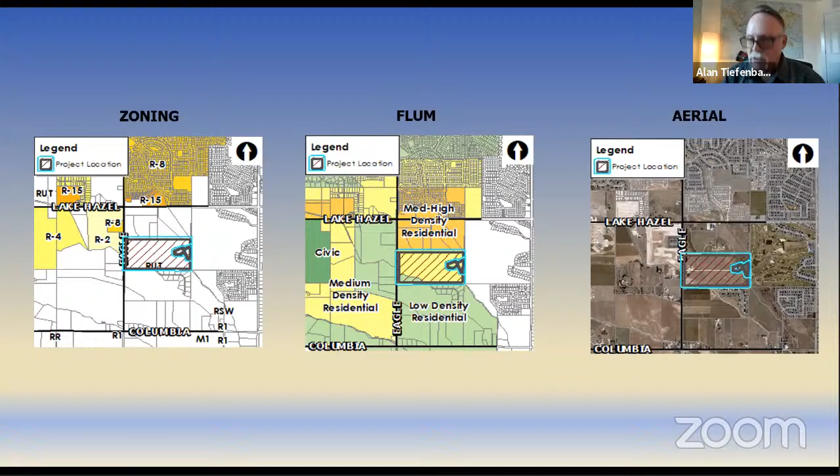At the time of the staff report, when this first went out, only 1 comment had been received. Since that time, we have 11 more letters that have been received. The issues expressed are a lack of transition in density, the R15 zoning being inappropriate, lack of sidewalks, and the reasoning from citizens is lack of sidewalks to fit more houses in, inadequate green space, this being fringe development. There were some concerns about school capacity, road design, and the proposed usage of Vantage Point Road, which I will get into shortly.

So here is the proposed zoning for this project. The applicant proposes R8 on the western portion of the site, so over here this will be residential 8. On the eastern part, over here, this is proposed as R15. R8 requires 4,000 square foot lots and a 40-foot lot frontage. R15 allows 2,000 square foot lots, and it does not have a lot frontage requirement.

This is important because the applicant has requested R15 zoning so that they can do private streets that would not be allowed under R8 or R4 zoning. All of the development is proposed, and all of these lots would meet the minimum requirements of R8. R15 is unnecessary, except for the reason of wanting to do the private streets.

As proposed, this zoning would zone the denser portions of the property to the less dense zoning. So this is the denser area, especially these attached units, these would be zoned to... the denser area would be zoned to a lesser zone district, less dense, and the lesser dense portion of the site over here would be zoned to the higher density zone district.

Staff has also mentioned to the applicant that we have some issues with the transition of lots. To the southwest, the development proposes lot sizes of 6,000 to 6,500 square feet, that's in here. The applicant has noted in a response letter that future development in the unincorporated land directly adjacent, down here and vacant now, would likely develop at a density of 8,000 to 9,000 square foot lots at 3 units per acre. However, the future land use map actually recommends this area for less than 3 dwelling units per acre, so staff is not convinced that would be the case.

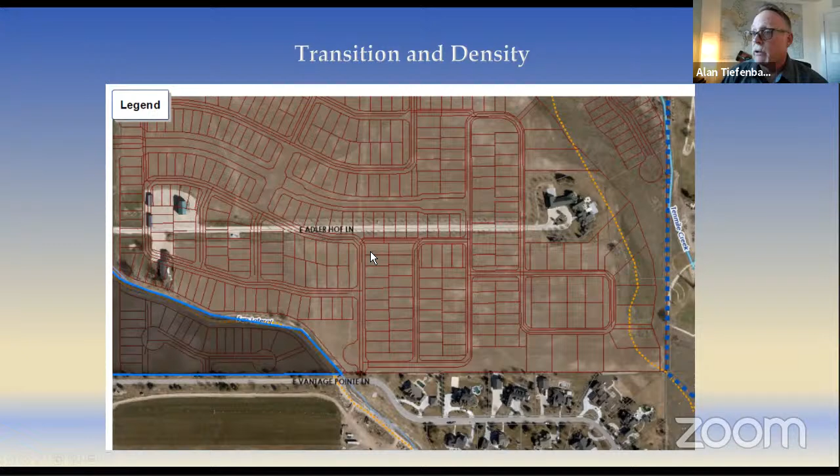Since the staff report went out, the applicant has submitted drawings proposing additional screening and buffering in this area. The Planning Commission should determine whether the applicant has provided an appropriate transition in lots to the Vantage Pointe subdivision.

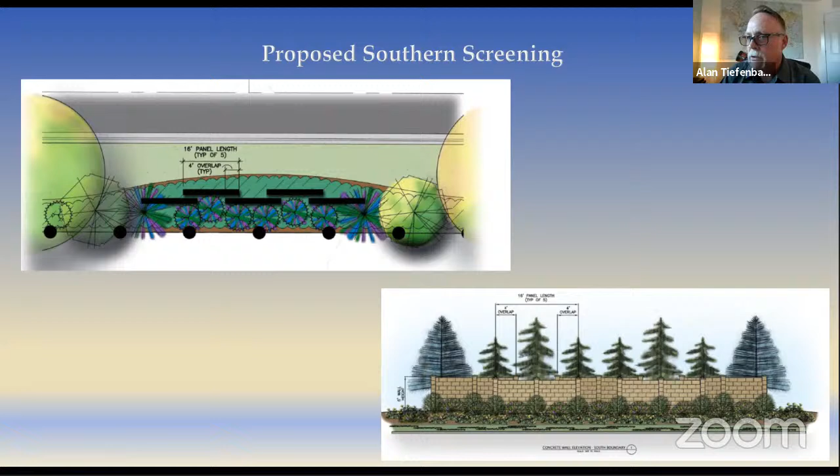The fire department has noted that this development can be serviced by the fire district, but has concerns. The major one is that this large subdivision, 329 lots, will only have one access. It now has multiple points, or two points of access to Eagle Road, and there could be an emergency access here. But only Eagle Road is the real point of access. If Eagle Road was blocked for any reason, fire would have to go all the way around, which would really slow down response time.

Fire has mentioned that they prefer a connection to Lake Hazel to the north. They had mentioned that they think preservation of the southern rim would prevent such an access. Planning isn't convinced - there could be discussions about the properties to the north to get a northern access here.

We have concerns with only one road in, one road out. The west end does fall within the 5-minute response time, but the majority of the subdivision is outside of that, as you heard this evening. The nearest station currently has a low reliability rating, which would improve once the new southern station is built - which you'll hear about in the next case tonight. Fire has also noted that the gates would cause delays.

Staff would prefer that the applicant work with one or some of the property owners to the north to achieve access to Lake Hazel, giving a second point of access out of this subdivision.

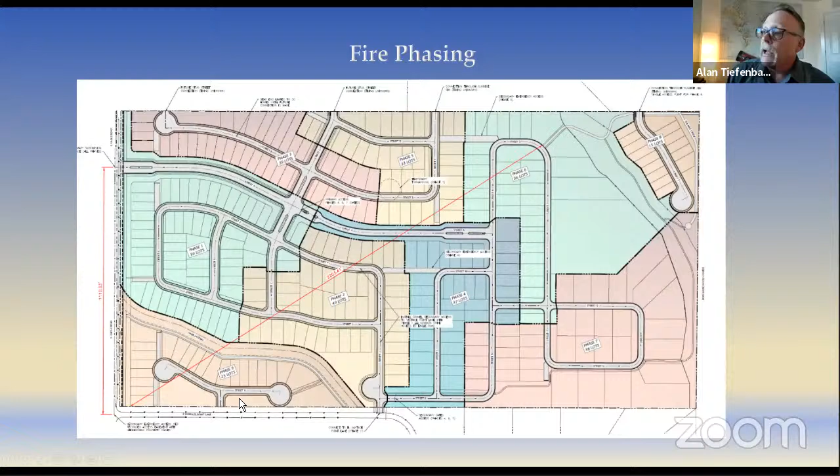The applicant has submitted a fire phasing plan including 59 lots in phase 1. Only phase 8 proposes access from anywhere other than Eagle Road. Phase 9 only has emergency access, which I'll discuss shortly. Also, all lots except for 15 in phase 8 utilize Eagle Road as the only point of access. Phase 8 cannot be built until Pura Vida builds out, so unless that happens, this phase isn't going to happen.

Phase 9 does not have any proven access. There is an emergency-access-only easement allowed here, which makes appropriate access for this particular phase, but all 23 lots here cannot be served at present unless the applicant gets legal access. Staff has concerns with supporting the project where we do not know if they have legal access, and the developer at this point does not seem to have control over that.

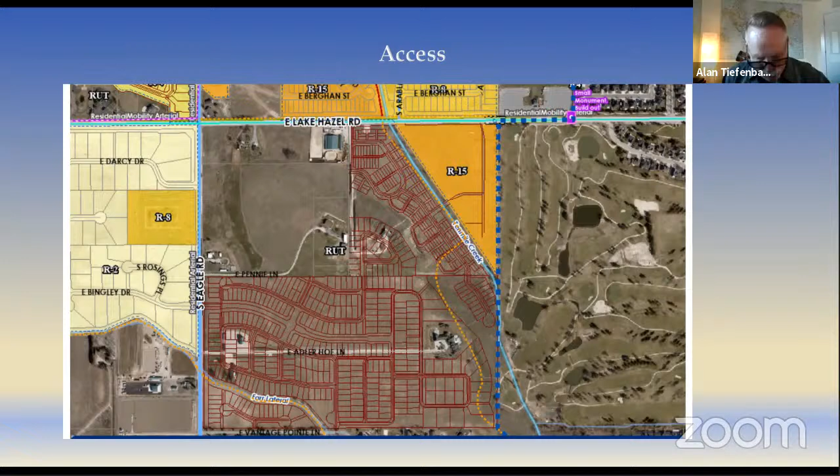This application proposes 112 lots to be served by private roads and 2 gates. I've outlined in red the area that would be served by the private roads. The private roads proposed are as narrow as 27 feet with no sidewalks or landscaping. The applicants commented that 27 feet is a minimum width for ACHD, but it does not meet ACHD templates because there are no sidewalks. Because these roads aren't built to minimum ACHD standards, they pass maintenance costs on to the homeowners in perpetuity, or the homeowners association.

Because they don't meet ACHD standards, if there were financial constraints or anything else in the future, ACHD would not accept these roads. Staff does not understand how narrow roads without sidewalks are innovative or preferable to streets with sidewalks. Staff has asked the applicant to explain why this is preferable, other than the ability to increase lots or reduce building costs. The only explanation we've gotten is that it provides an intimate setting and that there's a demographic that prefers a gated community.

Staff has concerns with supporting this feature without sufficient justification, and what precedent it would set for future requests to build roads that don't meet minimum templates. The applicant has requested alternative compliance to allow 112 lots be served by 2 gates and 2 emergency gates, 3 common driveways off of a common lot. The planning director denied this request for alternative compliance, believing that none of the conditions for alternative compliance was met.

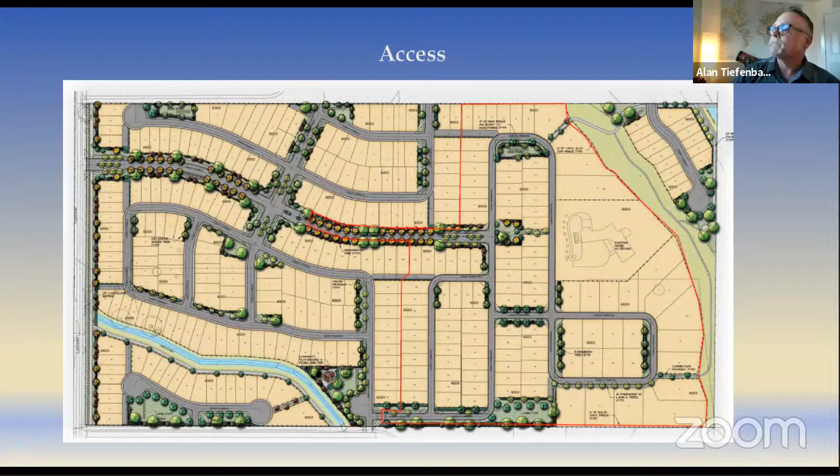Parks, amenities, and open space. The applicant states 14.99 acres, or 18.8% of open space, is provided. These parks and amenities include a 3 and a quarter acre tot lot with play structure, climbing rocks, and outdoor seating, which you can see here, a 1 acre open sports park, which you can see here, pathways along the far lateral, which you see here, and there's also a pathway coming along this slope. There's a golf cart pathway here, which would provide golf cart access into the Boise Ranch Golf Course.

There are several dog parks. There is one shown here, there is one shown there, and there is an entry park, which you can see here.

Staff does believe that some of these amenities would be valuable, such as the sports park and the tot lot. However, aside from that, much of what they're crediting as open space is buffers along roads, end caps, open space that could not have been used anyway, like the slopes or the area within the far lateral, and not all of it is landscaped per the UDC requirements. You have to have one tree per 100 linear feet for a pathway, and for common open space, one tree per 8,000 square feet. We don't see that within the area of the far lateral or around the slope area.

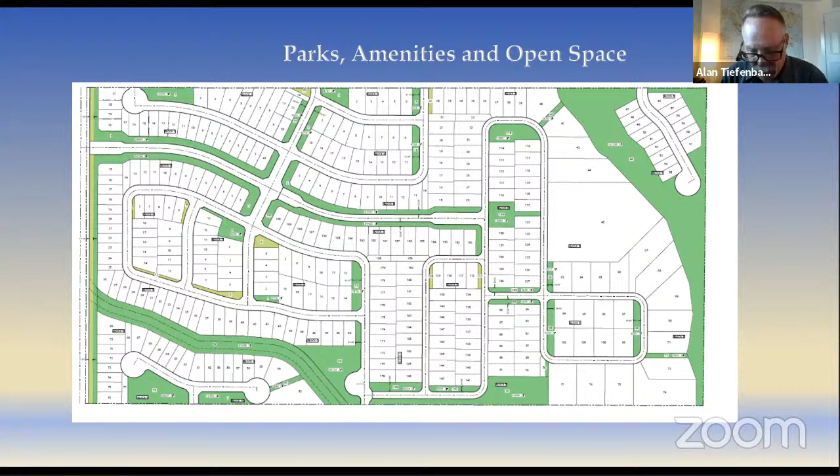The applicant has submitted a pedestrian circulation plan with this proposal. All the private streets shown without sidewalks are being reflected as pedestrian connections. The Planning Commission should decide if those really are pedestrian connections, and whether this is appropriate open space and amenities. Here is the proposed pedestrian plan - again, you'll see that many of the roads that do not have sidewalks or pathways are shown as a pedestrian connection.

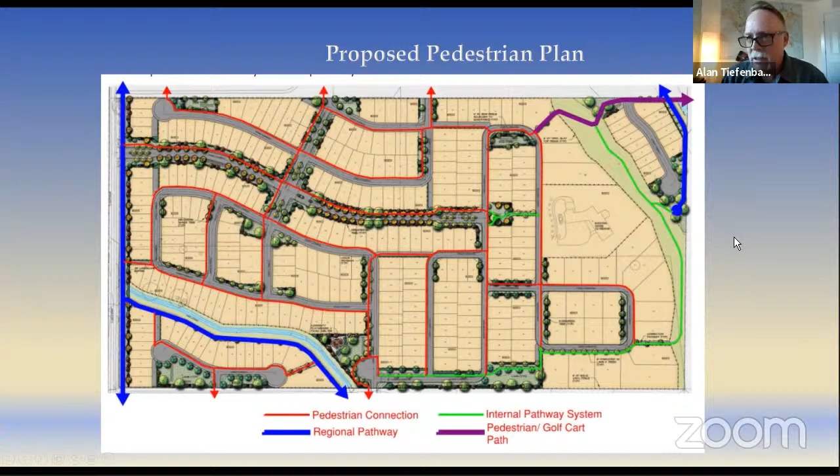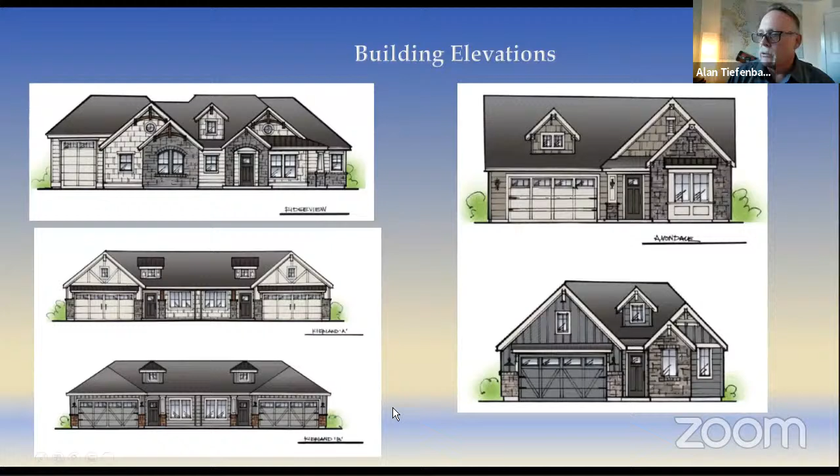Here's just a picture of the elevations. Overall, we believe that the elevations are quality and we support what they're doing with that. You can see the single family residential as well as a duplex style elevation.

Staff recommends denial of this project. Staff does not believe this project substantially complies with the comprehensive plan and is in the best interest of the city. This is why: there's only one access road for all but 15 lots, and the applicant has not demonstrated legal access for 23 of the lots in phase 9.

We believe there's an inadequate transition of lots to the lots in the Vantage Pointe subdivision. We are struggling with the higher density zoning for the lower density area, and the lower density zoning for the higher density area, when really it's just for the purpose of allowing the private roads.

We don't support it because we believe it's located on the fringe. There are only a few places where it's adjacent to the city limits. We don't believe it's an infill development.

We don't support it because of the narrow private streets with no sidewalks. It does not meet the comprehensive plan's goals for a walkable community. Although fire says they can serve it, they have expressed concerns with this development.

There is some quality open space, but much of the open space being credited is not usable, even if it meets the minimum dimensional requirements.

The applicant has noted school capacity will not be an issue because it's age targeted. But unless it's deed restricted, there's no way we can enforce whether or not it's going to be above 50. So it may be sold or marketed as over 50, but we can't enforce that unless there's some sort of deed restriction.

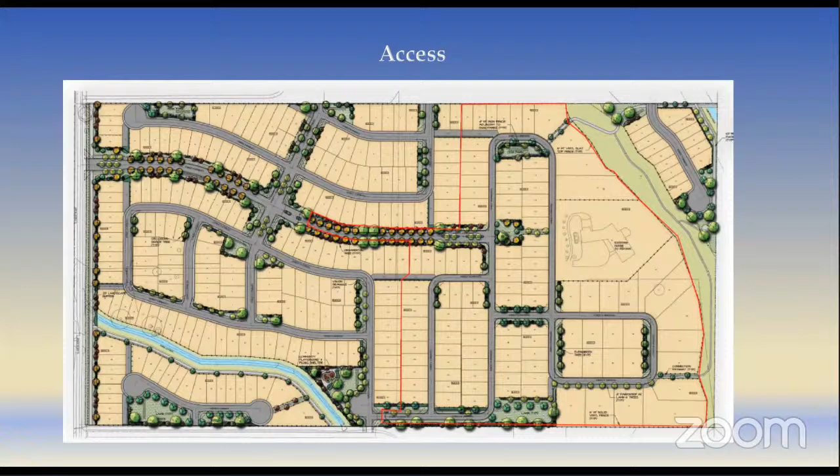Let's see, start here. Well, good evening commissioners, can you see my screen? Not yet, is it sharing? Okay let me try again. Okay, I think it's working now. Good evening commissioners, my name is Deborah Nelson.

My address is 601 West Bannock Street. I'm here on behalf of the applicant, and members of the development team are here with me as well and available to answer any questions. We're going to start with a brief fly-through of the development.

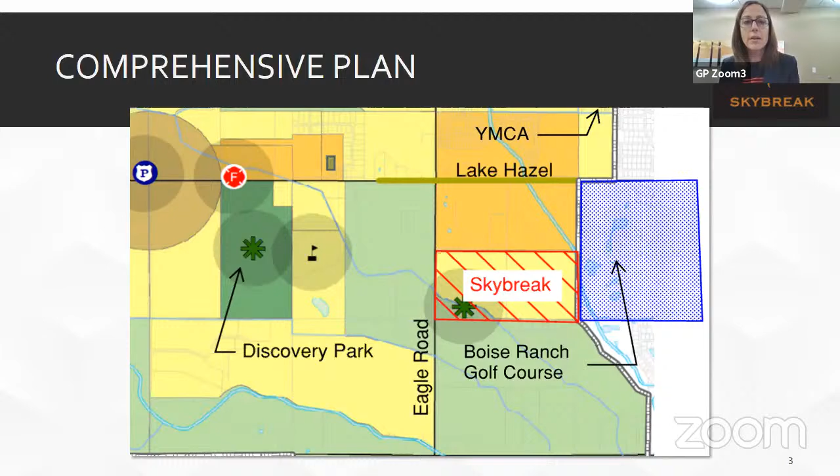Additional rooftops in this quickly developing area of Meridian help support the future commercial and retail uses along Eagle Road, Lake Hazel, and Meridian Road, including in the recently approved Pinnacle project, which has neighborhood commercial at Lake Hazel and Locust Grove. The 77-acre Discovery Park and the new South Meridian Fire Station site are just a half mile to our west. Pura Vida and Poima were just approved to our northeast. And we're close to shopping, healthcare services, employment opportunities, and regional transportation arteries.

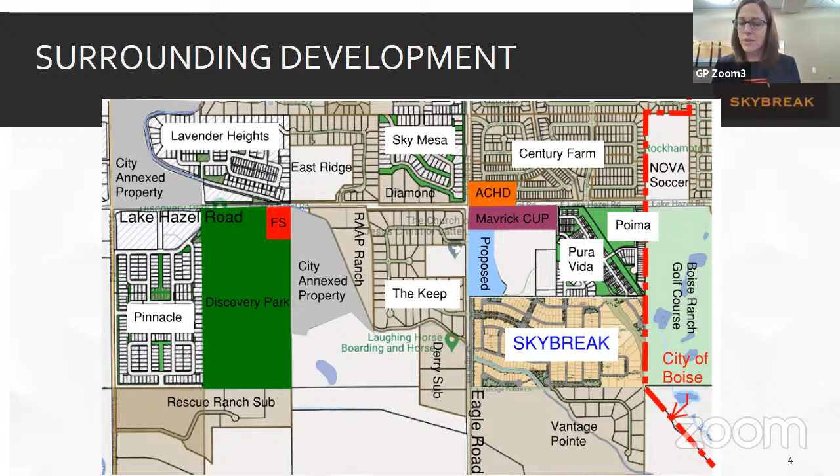The Skybreak site plan embraces the property's challenges and opportunities. The southern rim with a 50 to 60 foot drop along our east end provides exceptional view lots along with an opportunity to protect that natural hillside with open space and a pathway. The lack of road access along our northeast and east and southeast due to these existing developments makes this site ideal for a gated community because it doesn't block any road connectivity.

The golf course on our east side provides its own great opportunity to connect with pedestrian pathways and a cart path. A large existing home will remain, so we'll surround it with other large custom homes. Attached housing in our northwest transitions to high-density development planned to our north, larger custom home sites along with open space and landscape buffers transition to existing low-density homes to our southeast. Smaller lots and homes in the west along East Eagle Road transition to larger lots and homes in the east along the rim. All of these will meet the R8 dimensional standards in your code.

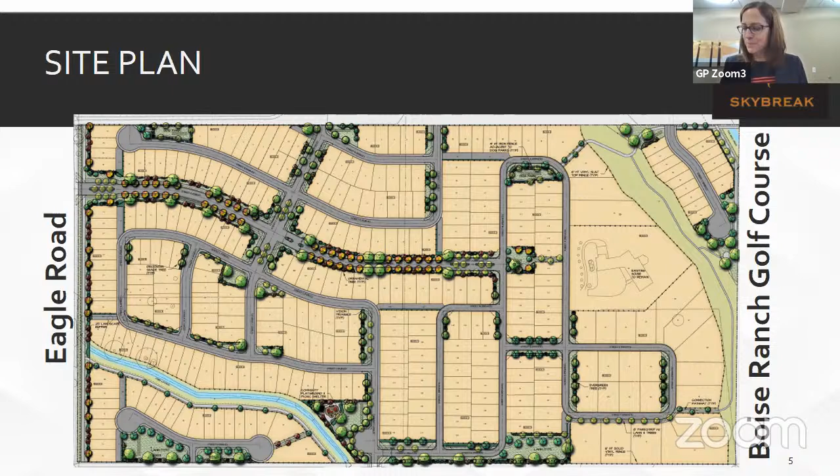A portion of the Skybreak community is gated and utilizes private streets to create a more intimate neighborhood setting within the larger Skybreak community. The development team has done extensive marketing and polling of past and future homeowners and has found that a demographic of senior home buyers prefers the security that a gated community provides.

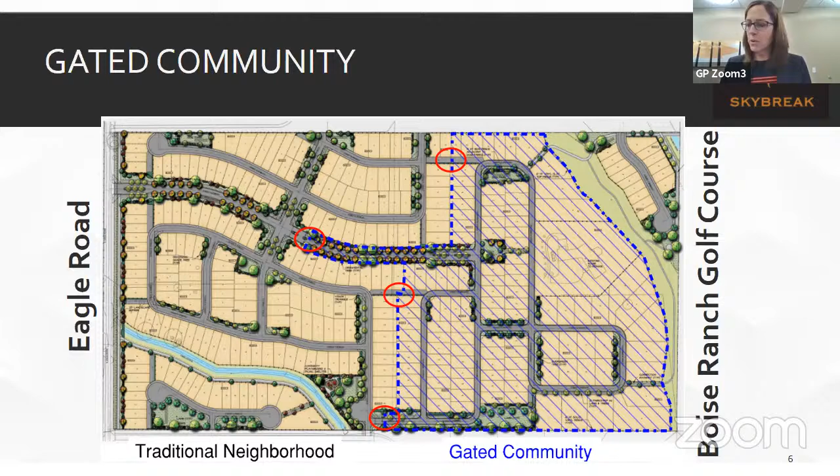The gates do not create any pedestrian barrier. The sidewalks and pathways are not gated. The gates slow cars, and the narrower private streets are intentionally designed without sidewalks in many locations to provide a pedestrian lifestyle where residents walk and convene in the streets and engage with each other. The development team has done other communities with the same private street design, and customers pay a premium to be in these gated communities. Everyone views the streets as walking paths that cars are allowed to drive on.

We have a video to illustrate this that we'll show at the end if we have time.

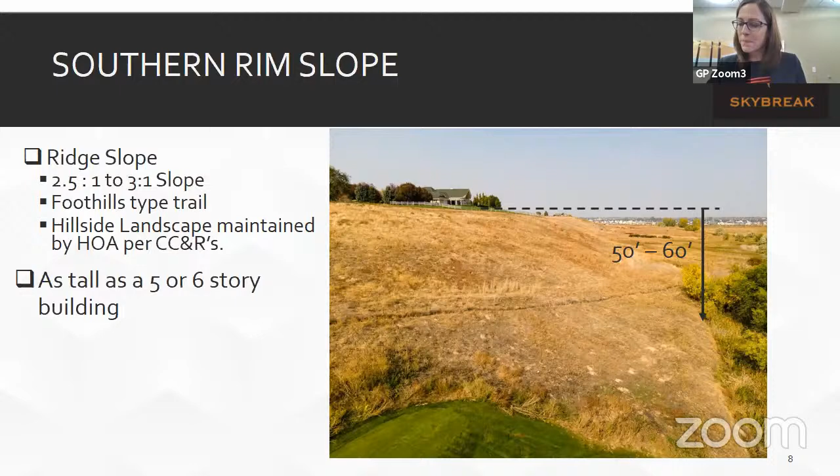The Skybreak property is ideally suited for a gated community because of several factors: the steep natural hillside of the southern rim, the lack of road connectivity on our eastern end above the rim due to the golf course to our east, the Vantage Pointe subdivision on the southeast, and Pura Vida, recently approved on our northeast, which does not include any road below the rim and down to connect to Lake Hazel.

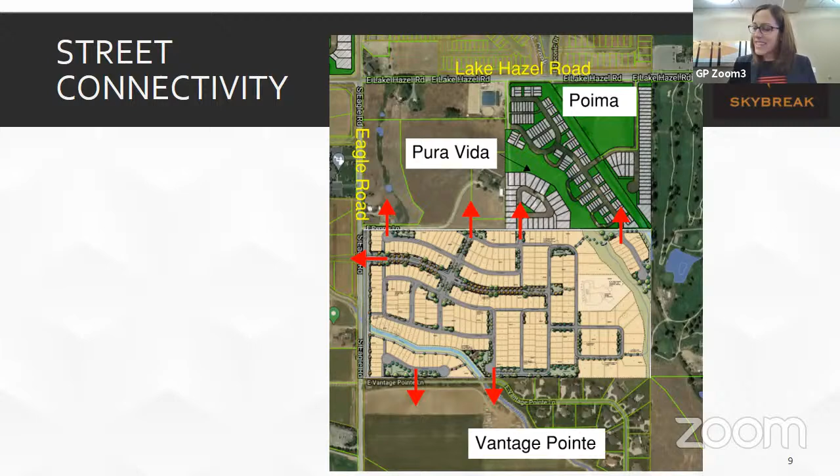Where we can connect to surrounding properties, we do: below the rim in the northeast corner, 3 additional places on the north, our western entrance, and 2 places on the south.

Skybreak includes premier open space and amenities. The developer has researched and interviewed past homeowners and used the city code to plan the most productive amenities for this neighborhood. Skybreak's planned open space and amenities far exceed city code requirements, providing 15 acres and 18.8% qualified open space and providing 14 amenities where only 4 are required.

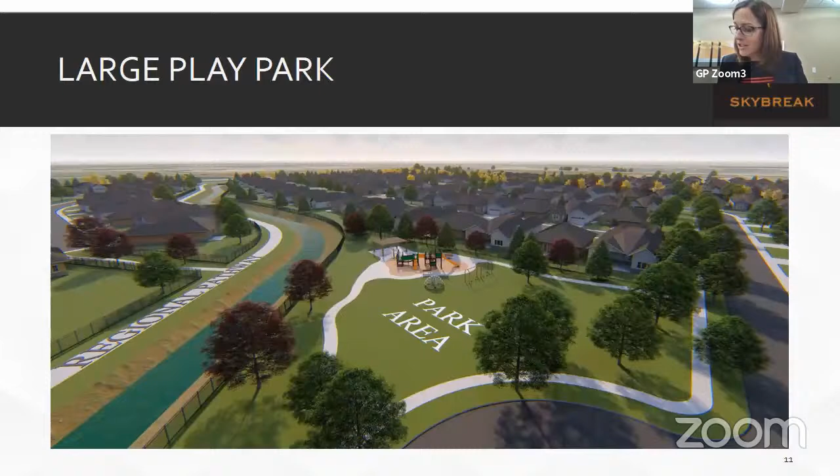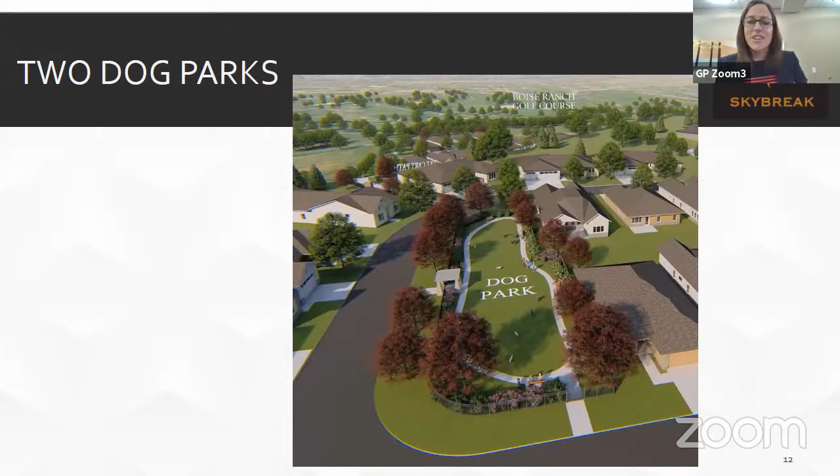Skybreak's open spaces and amenities include in our 3/4 acre park, we have a play structure, seating benches, shade structure, and climbing rocks. We have 2 dog parks because they are in such high demand by residents, each with open vision fencing, a dual gate system, and seating benches.

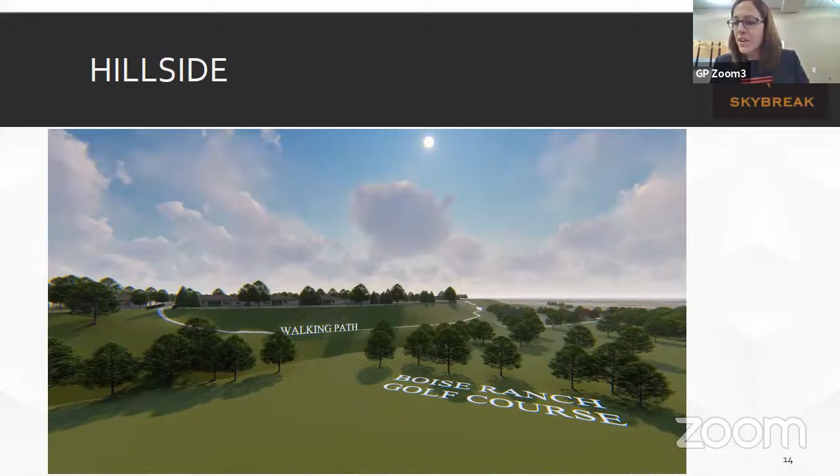Our 1 acre open sports area with pathways, seating areas, and landscaping includes a large grassy central space to accommodate sports activities. Our natural hillside area is 2.82 acres, including native grasses and a natural hillside path with open views that everybody can enjoy. Here you can also see the golf cart access to the Boise Ranch Golf Course and one of the 2 10-foot regional pathway segments this development will provide.

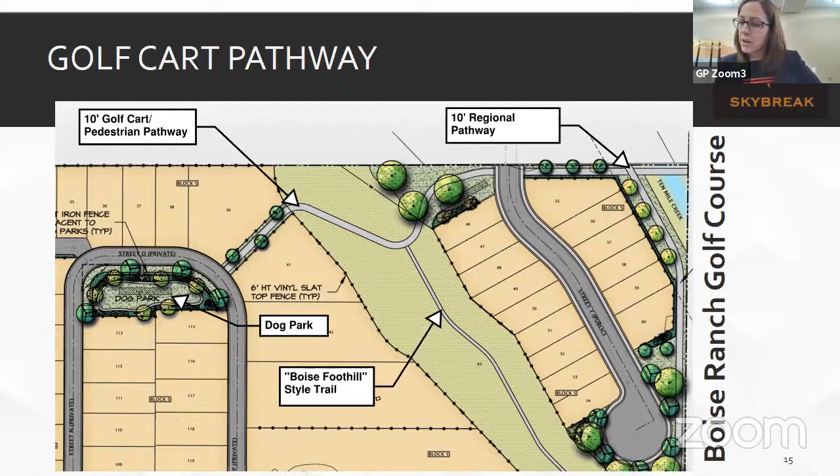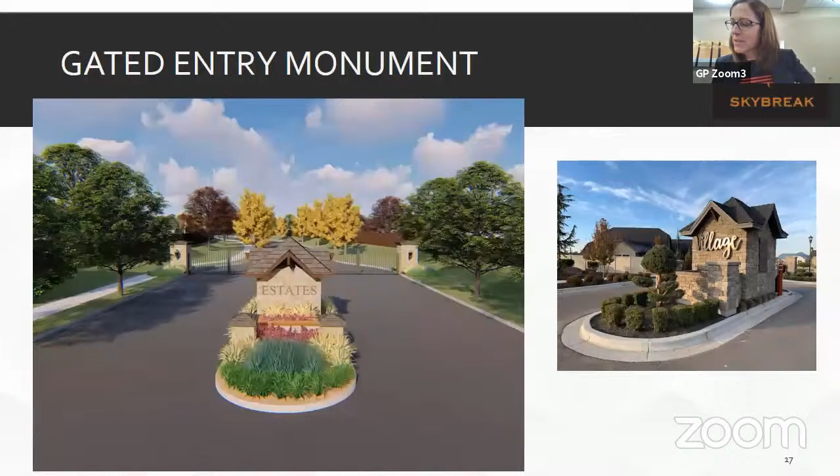Our entry park makes an attractive statement upon arrival and also caps the tree-lined collectors where residents walk, with seating areas and specimen tree plantings, and landscaping along the central collector and end caps adds aesthetic beauty and passive open space areas throughout the development. This slide in particular illustrates the value of that end cap landscaping to create a beautiful neighborhood, add privacy, and enhance walkways.

Skybreak has over a mile of constructed sidewalks and pathways, including a half-mile of multi-use regional pathways and a unique natural hillside path similar to neighborhoods in the Boise foothills, plus a loop around the entire development. None of those metrics include the walking paths within our private street network. That is over and above that description. In addition, Skybreak is a half-mile walk to the city's 77-acre regional Discovery Park.

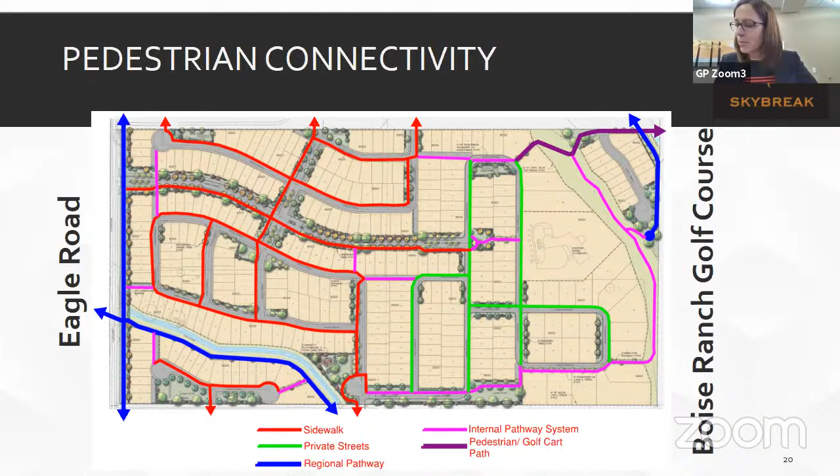In our northeast, Skybreak transitions to the higher density Pura Vida and Poima developments with smaller lots, continuous open space along the rim, and street connectivity above and below the rim. In our southeast, Skybreak transitions to Vantage Pointe with buffering, screening, and transitional densities.

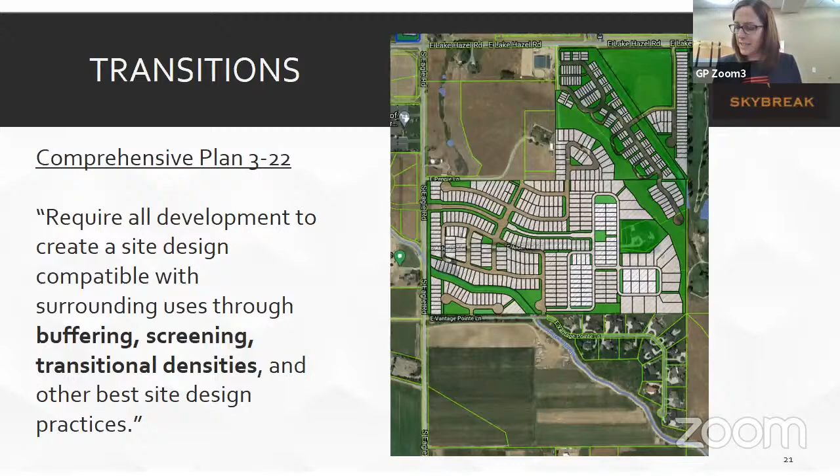Here you can see that southeast area in more detail. On the west end, we provide separation with a 50-foot wide landscape buffer around a local street, a 1 acre park, plus berming, landscape screening, and concrete walls to ensure no headlights disturb the neighbors.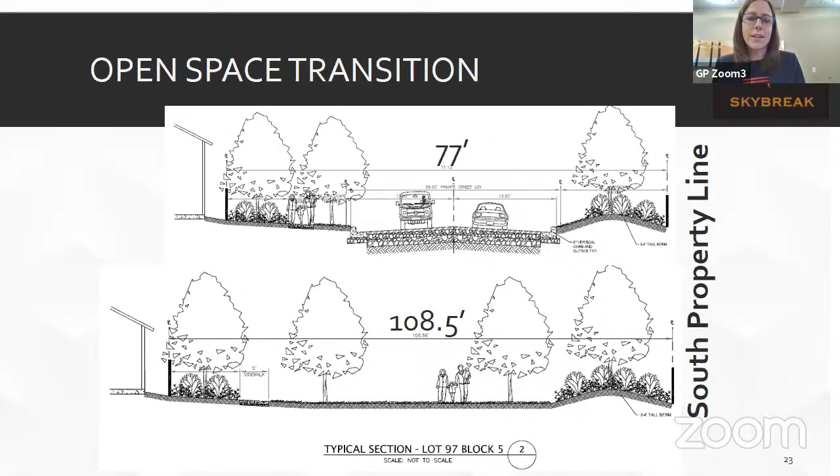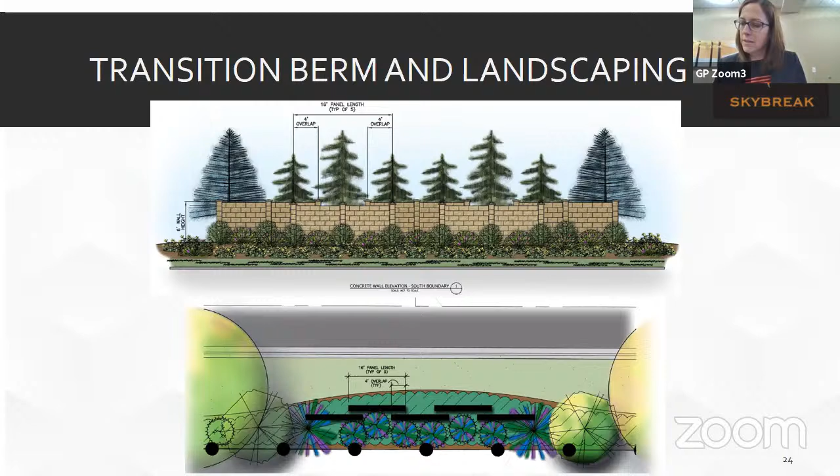Along the road, where there are 2 T intersections, in response to neighbor concerns with headlights, the developer has added 6-foot concrete walls on berms with heavy landscaping to block all light. This slide illustrates the wall placement, along with the heavy landscaping and the significant open space buffering that is provided here. You can really see the distance.

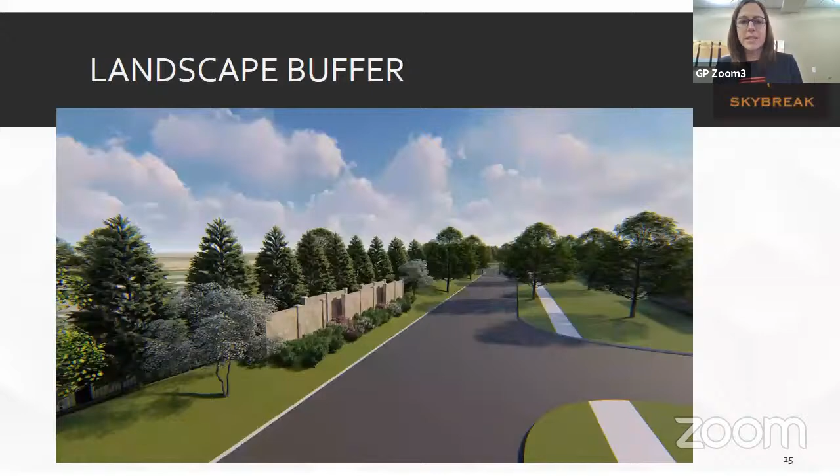In the limited area where we directly abut existing homes in the southeast corner, we provide half-acre lots, double the rear setback to 30 feet, and triple the side setback of the corner lot to 15 feet. The orientation of these lots is ideal for creating bigger open space and a larger setback between the house and our neighbors. We also agreed on that corner lot to pull back the building footprint from the rear, 45 feet on the north side and angling down to 110 feet on the south side as an accommodation to the adjacent landowner.

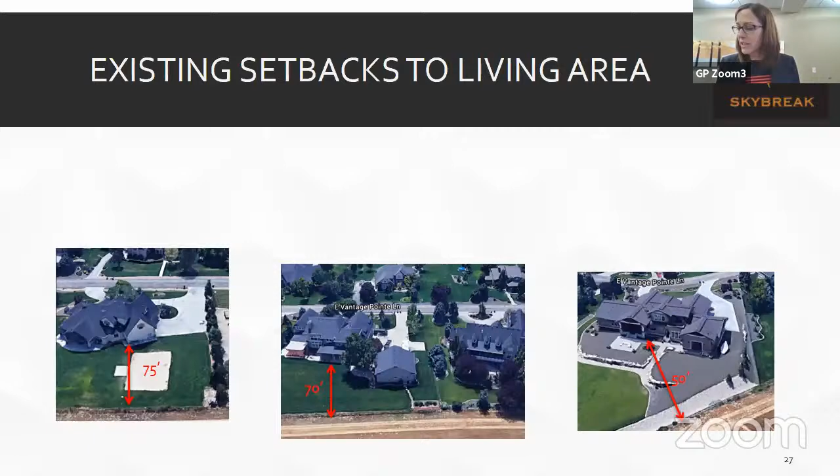In addition to all of these accommodations on our property to create transition, when considering compatibility to surrounding uses, it's appropriate for the commission to look at the facts of those uses. Here, the adjoining homes are set back 50 to 75 feet from the property line. So for all of these reasons, Skybreak provides more than sufficient transition to surrounding developments.

Water, sewer, and all other infrastructure is adjacent to and ready to serve this site. The developer has had several meetings with Joe Bongiorno and the fire department over the last year. Joe's March 3rd comment letter, his final letter in the record, clearly states this project can be serviced by the Meridian Fire Department. Joe requests Opticom devices on gates and a wildland safety plan for the natural hillside, and the applicant agrees. The site entrance is within the emergency response time goals for the fire department and other first responders, and most importantly, it is within a half mile of the planned fire station near Discovery Park.

Skybreak is anticipated to have a low impact to schools based on the empty nester target demographic, but regardless, the schools serving Skybreak have capacity. Hillsdale Elementary and Lake Hazel Middle School are within planned capacities, and Mountain View High School was just expanded and is within the capacity range the city determined was acceptable in considering the Pura Vida development in the same area just 2 months ago.

ACHD has reviewed and approved the proposed development with conditions of approval that are all acceptable to the developer. The already underway improvements and widening of Eagle Road and Lake Hazel Roads provide ample capacity for the trips generated by this development. ACHD has conditioned Phase 9 in the Southwest on having access to a public road, so staff's concerns will be addressed by that condition already.

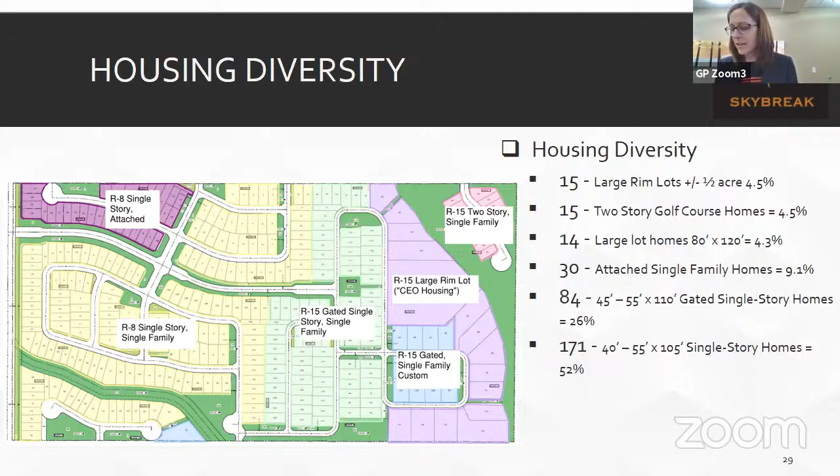We are really excited to bring this premier golf community to Meridian. And if we have time, if the chairman allows, we would show a short video about a successful gated community that has been developed in Boise by the same developer with the same street design that's proposed here.

Unfortunately, the 15 minutes is up. Okay, that's fine. It's in the record if anybody has the opportunity to review it.

Thank you for your attention, and be happy to stand for any questions. Okay, at this time, are there any questions from the commissioners to applicant or staff?

Mr. Chair. Commissioner Grove, go ahead. I thought with the developments that had happened to the northeast of this project that there was conversations about having road connectivity when this was to come before us. Was I misunderstanding that, or did that get planned out?

Chairman, I'd be happy to address that question. Commissioner Grove, the Pura Vida development to the north was not approved by the city requiring any access down the rim. I think that they looked at the natural hillside and saw that it wasn't suitable for placing a road there. The top portion of Pura Vida, above the rim, does connect to Skybreak, but there's no connection between the top portion of Pura Vida down to the lower portion of Pura Vida, creating that Lake Hazel connection. And the city approved it in that way.

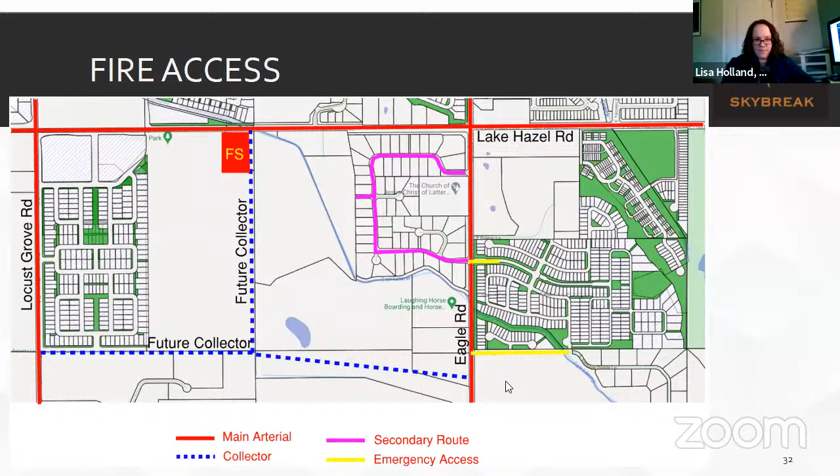Mr. Chair, Commissioner Grove. I move to close the public hearing for the Skybreak neighborhood, H 2020-0127. Second. It has been moved and seconded to close the public hearing for hearing item number H 2020-0127, Skybreak neighborhood. All those in favor say aye. Aye. Any opposed? Okay, the motion carries.

All right, who wants to start us off? Mr. Chair. Commissioner Yearsley, go ahead. I don't mean to be mean, but anytime you hear in my opinion someone be honest about something, it's usually not the case. I have to admit the premier community is in the eye of the beholder, and at this point, I don't behold this as a premier community. I look at it as trying to stack as many homes on 80 acres as you can, in my opinion. I don't think that this fits the area.

We're on a rim lot. If you look at the homes around this, they're either a half acre all the way around, or acres or larger. I would prefer to see this an R4 at minimum type development with all ACHD streets. We have private streets within our community, and we have to devote a significant amount of our HOA dues to maintaining those private roads. And they've got a lot of private streets, no sidewalks. It just, to me, does not fit this area. And with the amount of common driveways they have, with the number of homes on this, it just feels like they're just trying to stuff as many homes in this subdivision as possible. So I don't see it as a premier community, and I don't think it fits this area. I can't recommend approval even going forward.

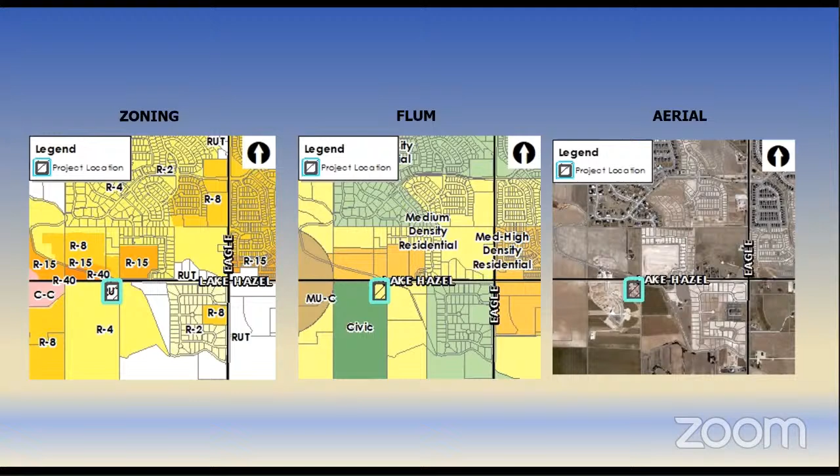Again, this is a request for annexation and zoning of 4 acres of land with the R8 zone district. Although much of the land surrounding the site was annexed in 2015 as the South Meridian annexation, the subject property was not included as part of this annexation. This site is directly adjacent to the new Discovery Park.

It's directly west of this property. The plans are to develop the fire station and the police substation separately, possibly not at the same time. My understanding is they may start as early as next year - I can leave that to Stacy with the city to clarify. Following annexation, a conditional use permit will be required, so it would come back to you as planning commissioners, and you would be the approval or denial body on that, because this is a public or quasi-public use that requires conditional use approval.

The applicant has proposed to construct 2 driveways from the site to the new collector. Here is Lake Hazel Road - there's existing access here, and over here there's existing access for Discovery Park. ACHD eventually wants to cut off that access. In fact, our regulations say we should be limiting accesses off of arterials.

There will eventually be a collector built here. The applicant will be required to build this collector down to the south side of the property. They will also be required to build a 10-foot wide pathway along the north and a 10-foot wide pathway along the east, as required per our master pathways plan.

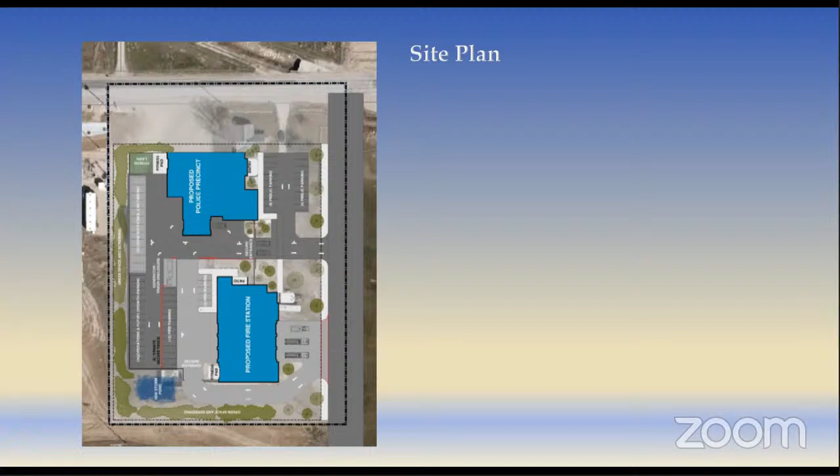They would have to do a certificate of zoning compliance, which is administrative and would be reviewed by staff, and we would look at the architecture against the architectural standards manual. With that, I will entertain any questions if there are any.

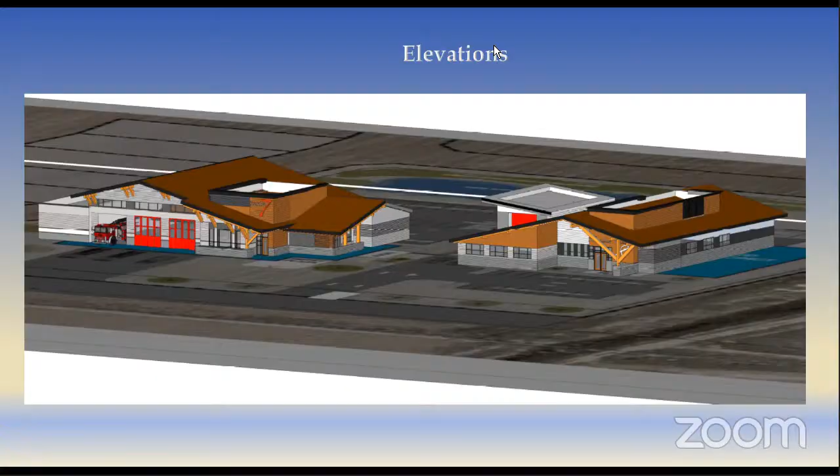Is there any public testimony? We did have one person sign in online wishing to testify. Dean Kidd, if you're on the line, can you please raise your hand in Zoom? I don't see anybody raising their hand. Is there anybody in chambers that wants to come up and testify? No, seeing none.

Just one more check here. If anybody is joining us via phone on Zoom and you'd like to raise your hand, please press star 9 on your phone. Still not seeing anybody raise their hand. So Gunnar, if there's anything else you'd like to add? No, I think that was all we had.

Okay, last call for questions from commissioners. Commissioner Holland, go ahead. I'm going to make a motion that we close the public hearing for H-2021-0008 from Meridian South Fire Station to move to deliberation. Second. It's been moved and seconded to close the public hearing for Meridian South Fire Station and Police Substation, H-2021-0008. All in favor, say aye. Aye. Any opposed? Motion carries. All right, who wants to start off?

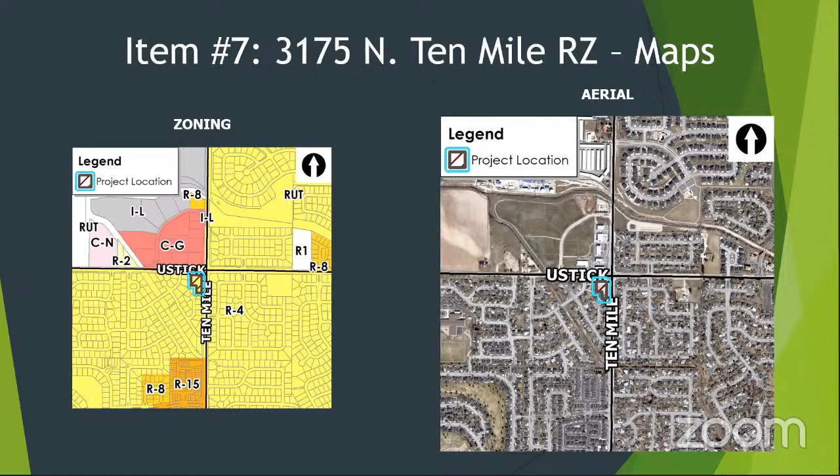The proposed use is for a dental office, which is a principally permitted use within the requested LO zoning district. The applicant has submitted a site plan that shows compliance with all dimensional standards for a commercial development. With the proposed site plan and proposed use, staff finds the proposed rezone and use to be generally consistent with the comprehensive plan. The subject site was annexed into the city in 2010 and thus has an existing development agreement.

As staff analyzed the application and the existing DA, staff realized that a DA modification is also required because the original DA contemplated a residential development and not a commercial development. Therefore, the proposed rezone and office use are not generally consistent with the existing DA. DA modifications only require council action.

So following this hearing, should they receive a recommendation of approval, staff recommends the applicant submit a DA modification application to run concurrently with this rezone for the purpose of entering into a new DA subject to the proposed development plan, which is this site plan, and the new DA provisions noted within the staff report.

The existing DA provisions, there is one existing DA provision that requires a 20-foot landscape buffer adjacent to the 3 existing residences to the south and west. The submitted site plan shows this buffer with adequate landscaping and therefore compliance with that existing provision.

In hindsight, the 20-foot buffer is also a minimum buffer requirement for the requested LO zone adjacent to any residential use. A number of the parking spaces are facing directly towards one of the residences, which would be these here I'm referring to. And there is an existing wood fence located along all of the shared property lines to these homes.

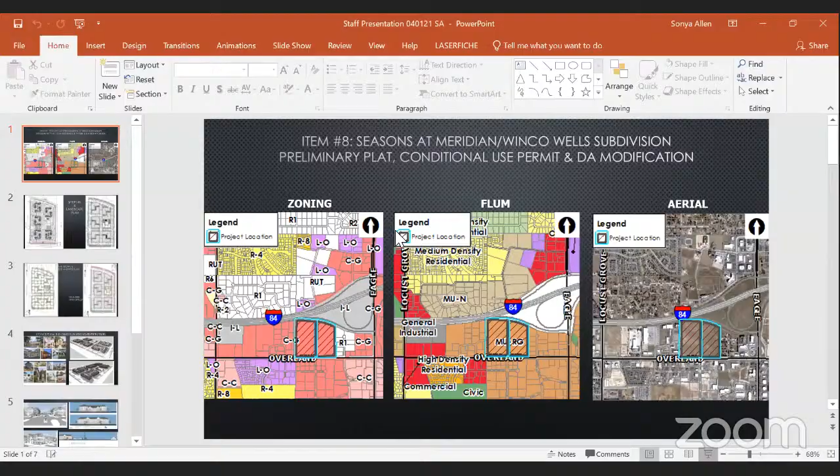So we will start back with file number H 2021-0007, Seasons at Meridian Winco Wells subdivision. We'll start with staff report.

Thank you, Mr. Chair, members of the commission. The next applications before you tonight are a request for a preliminary plat and a conditional use permit. There is also an accompanying development agreement modification application, but this does not require commission action, only city council. This site consists of 34.62 acres of land, zoned CG, located at 2600 and 2700 East Overland Road.

Adjacent land use and zoning to the north is the I-84 off-ramp. To the west is commercial, retail, restaurant, and animal care uses, zoned CG. To the south is Overland Road and a school, restaurant, and office uses, zoned CG. And to the east are single-family rural residential properties, zoned R1 in the county.

This property was annexed back in 1994, and a development agreement was approved in 2016. The comprehensive plan future land use map designation is mixed use regional. A modification to the existing development agreement is proposed to exclude the east parcel from the development. A new development agreement is proposed for the east parcel, which will accommodate the change in ownership of the east parcel if the conditional use permit is approved for the multifamily development.

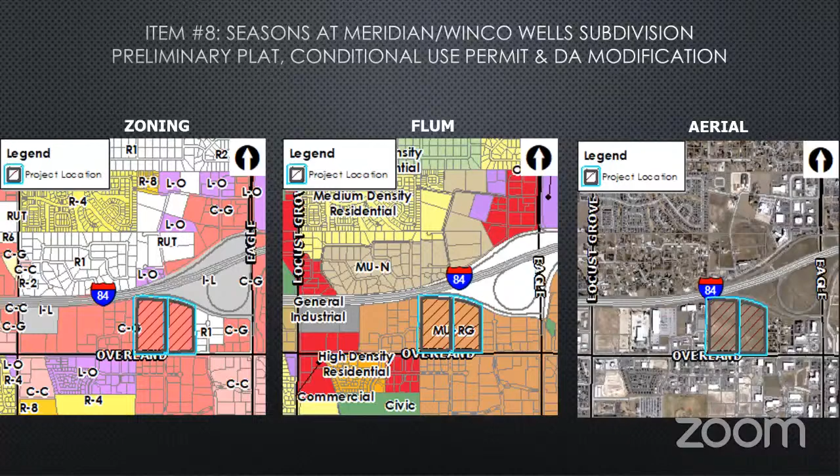The proposed development plan for the east parcel is a 360-unit multifamily residential development, as shown. Staff believes the proposed plan contributes to the mix of uses desired in the mixed-use regional designation and provides a transition and buffer between commercial uses to the west and low-density residential development to the east, Overland Way subdivision. The addition of more residential uses in this area will provide more patrons for surrounding commercial, retail and restaurant and office uses and businesses, as well as offer employment options in close proximity to the residents.

A conditional use permit is proposed for the 15.89 acre, 360 unit multifamily residential development as required by code in the CG zoning district. A total of 180 studio and 1-bedroom units, 150 2-bedroom units and 30 3-bedroom units are proposed in 10 structures with 36 units per structure. This development is proposed to be constructed in one phase.

A total of 3.8 acres of outdoor common open space is proposed, which exceeds the minimum 2.1 acres required. Based on 360 units, a minimum of 5 amenities are required, but the decision-making body is authorized to consider additional similar amenities if they believe the proposed amenities aren't adequate for the size of the development.

Amenities are proposed consisting of a clubhouse with a swimming pool, bike maintenance room, fitness facilities, parcel lockers, remote work classroom stations, and a coffee bar, an outdoor fireplace with seating and a barbecue, public art, a half-mile pedestrian loop with a 10-foot wide pathway and internal pathways, 18 grassy areas of at least 50 by 50 feet in size, including a dog park, multiple courtyards, park areas with seating, a plaza, and pocket libraries, community garden, and a children's play structure.

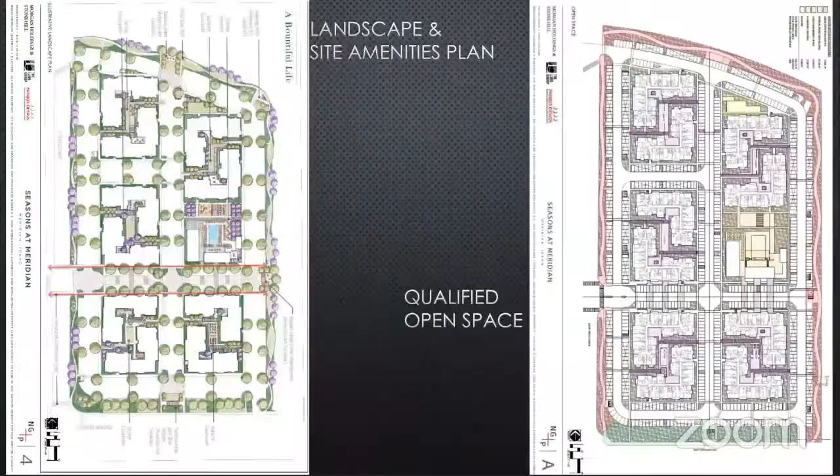Parking is proposed in excess of UDC standards. A minimum of 646 spaces are required, with 270 of those being in a covered carport or garage. A total of 655 spaces are proposed, with 360 of those being in a covered carport, which is 9 extra spaces over the minimum required for the overall site. The commission should determine if the proposed parking is adequate or if additional parking should be provided as a condition of approval of the conditional use permit.

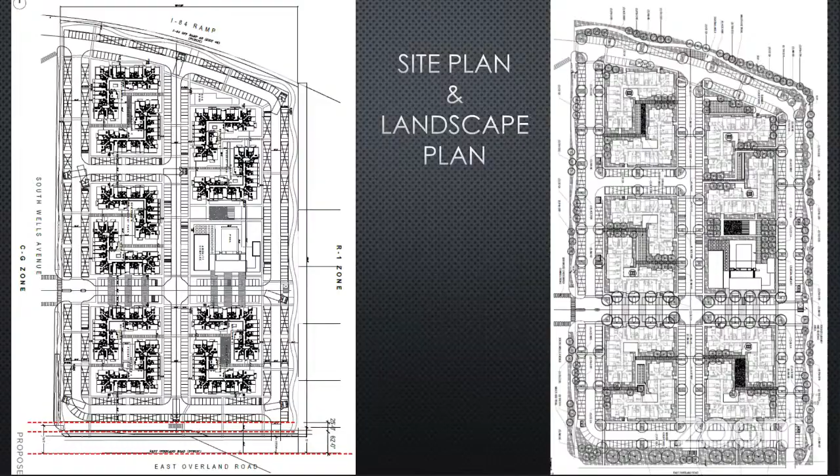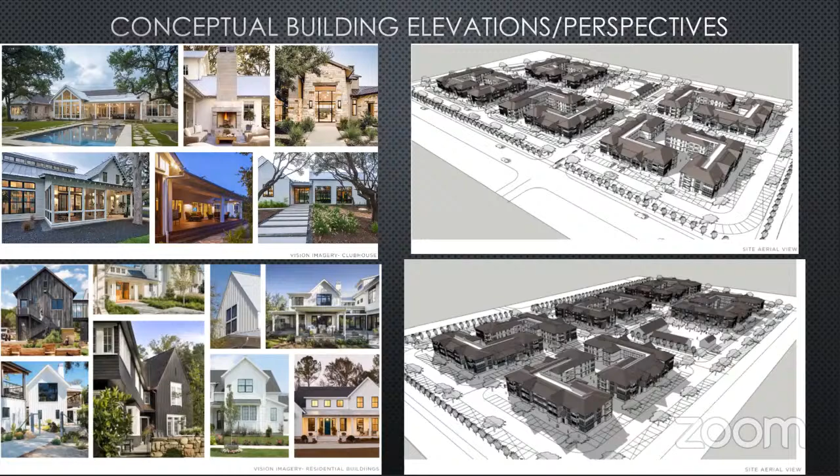L-shaped buildings are proposed for variety. The final design is required to comply with the design standards in the Architectural Standards Manual.

Right-of-way for the extension of South Wells Avenue and East Cinema Drive is proposed to be dedicated with the plat. In order to provide interconnectivity between uses in a timelier manner and disperse traffic, staff recommends the extension of East Cinema Drive from the west boundary of the site to South Wells Avenue occur with the first phase of development. The traffic signal at Wells and Overland is also required to be installed prior to issuance of the first certificate of occupancy.

Written testimony has been received from Deb Nelson, Givens Pursley, and Ryan Morgan of Morgan Stonehill Partners Development Company, the applicant's representatives. They are in agreement with the staff report except for staff's recommendation for Cinema Drive to be constructed with the first phase of development rather than with the second phase as proposed. Staff is recommending approval with the conditions in the staff report, and staff will stand for any questions.

Okay, with that, we'd like to ask the applicant to come forward.

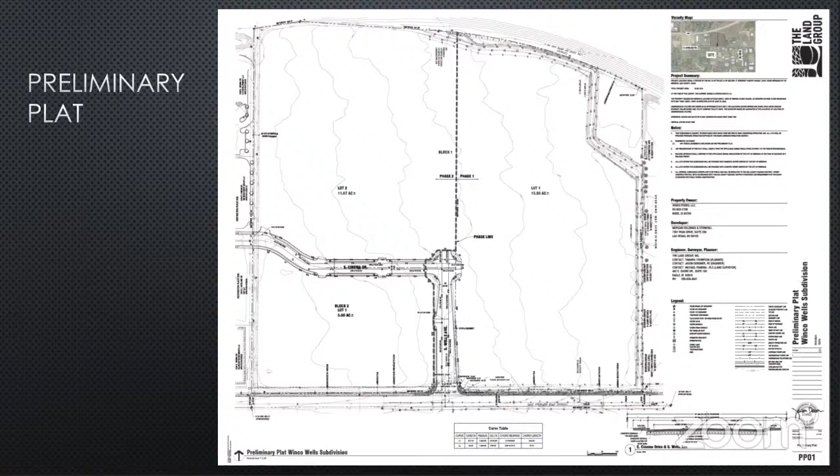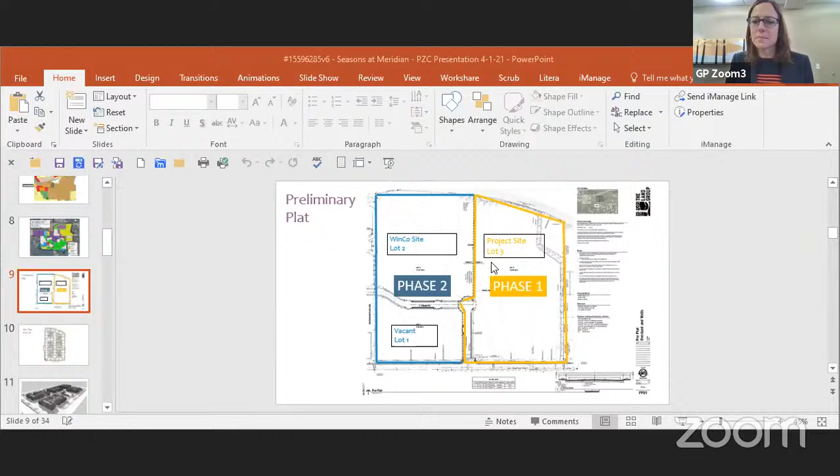I would like to bring up a presentation if I could quickly, and then I'll get going. There we go.

My name is Deborah Nelson. My address is 601 West Bannock, and I'm here on behalf of the applicant. There are also representatives of the applicant and our local development team here with me that are available to answer any questions that the commissioners may have.

Thank you to Sonia for her work on this project, her recommendation of approval, and her presentation this evening. I'm going to touch on a couple of the same things Sonia did, but I'll try not to repeat too much of what she said about the history, though there's some context relevant to our application request. And even though the DA modification is a council level decision, we think it helps for the commission to have a feel for all 3 of the applications presented together.

As Sonia mentioned, the Winco site is to the west here, and our project site is in yellow on the east. Both of these were annexed together in '94 in Zone CG, and then in 2016, the city approved the development agreement for that Winco development.

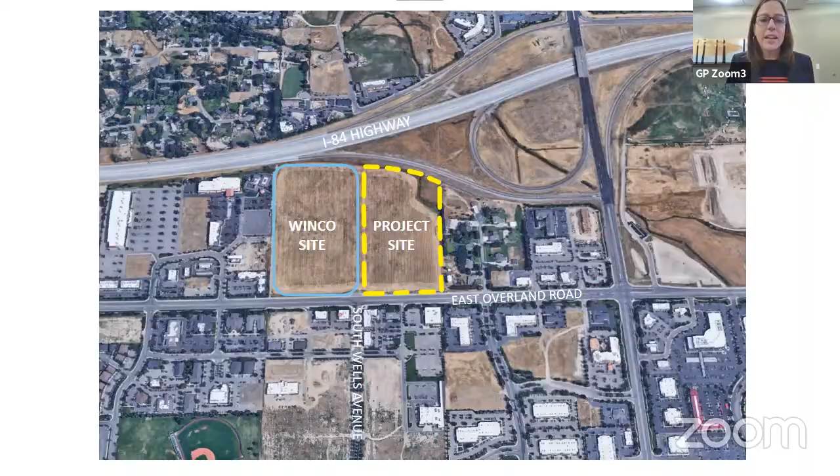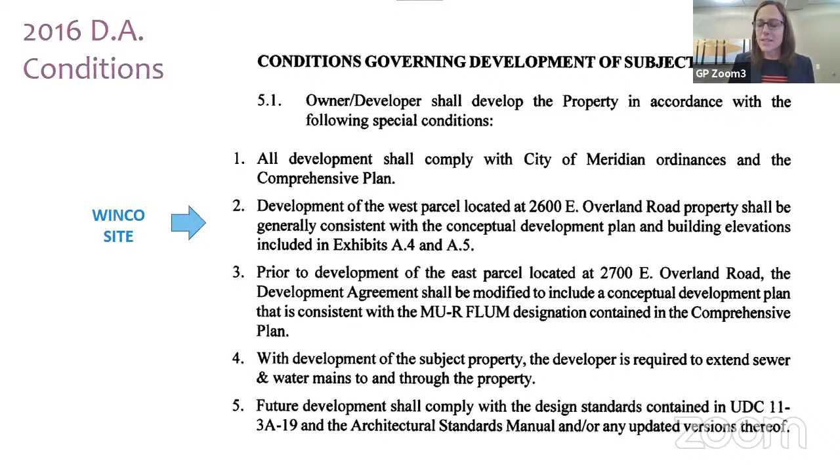I want to focus in just on the conditions there. Specifically, the Winco site is allowed to develop consistent with the concept plan, which was attached to the development agreement and shows that 85,000 square foot retail space with the parking.

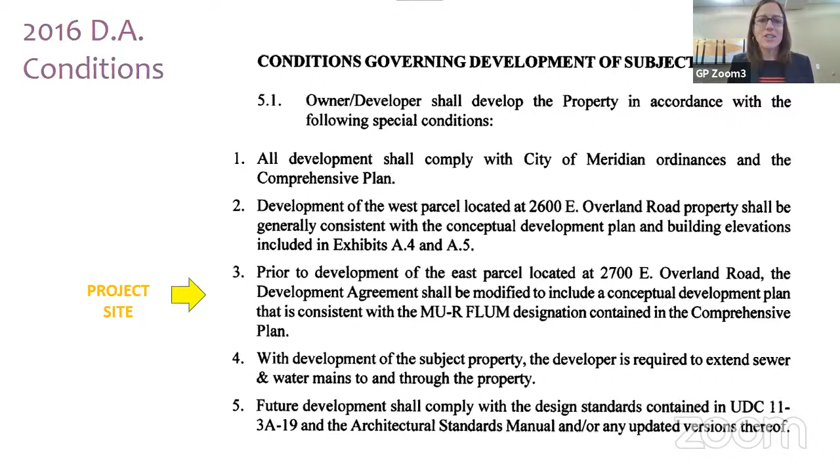Our site, on the other hand, at 2700 East Overland Road, required a development agreement modification simply for the purpose of coming back with that conceptual development plan when it was known that's consistent with the MU-R designation. And so that's why we have the DA modification pending at the city, and this is an overlay of the concept plan that we would add to that development agreement.

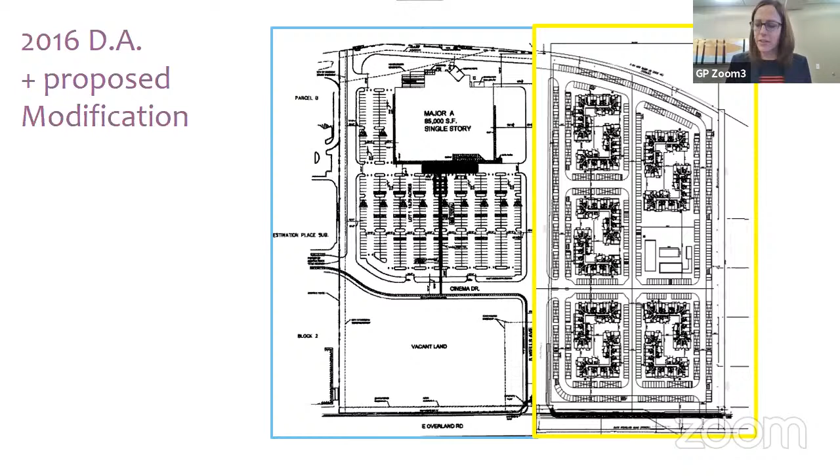As Sonia describes in detail in her staff report, the proposed multifamily use and development plan that we've proposed is consistent with the MU-R designation in your future land use map because it contributes to the mix of uses that's desired in that area by adding needed higher density residential in an area that's already heavily developed with commercial and employment uses. You can see from this slide that the MUR area in this location is very large.

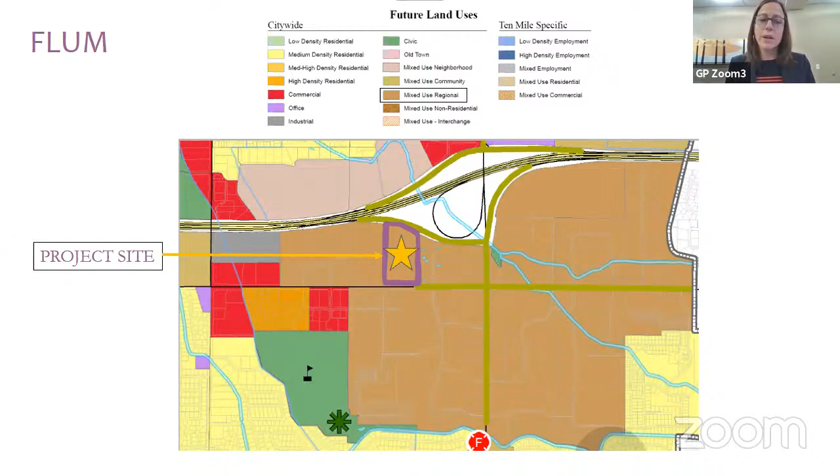It's 650 acres, and it calls for a mix of uses, employment, retail, and residential, with residential densities ranging from 6 to 40 units per acre. This particular large MUR area currently has extensive retail and office uses, but very little residential, and is far below the 6 to 40 target, with a current density of only 1.27 units per acre in this area.

It's particularly, has a particular residential deficiency in that quadrant where we are, in that northwest corner of Overland and Eagle, where the current density is only 0.06 units per acre. So as the staff report notes, the higher density residential here will support the surrounding commercial and employment, and it provides a great transition between the smaller low density residential to our east and the more intensive commercial to our west.

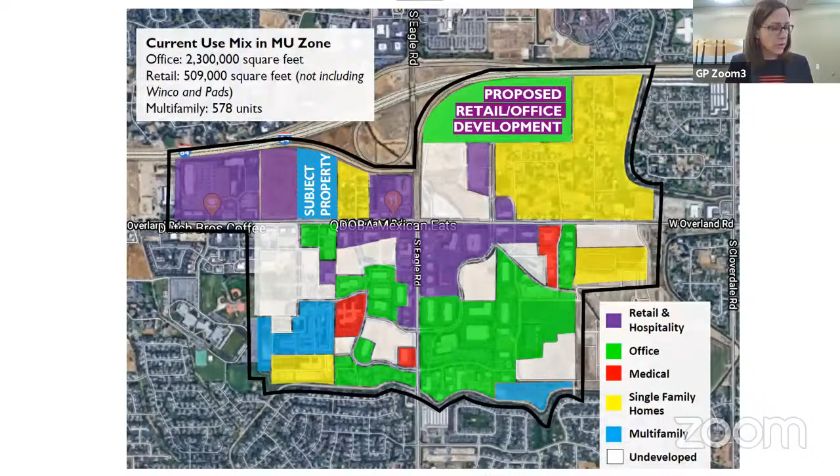In addition to the DA modification, we have the preliminary plat, which is needed to create the legal lots. The city and Winco Foods actually originally thought that the apartment site was a separate lot, and that's why the DA modification was filed before the preliminary plat application.

There's a record of surveys showing it. Separate homes and driveways were permitted there off of Overland. It's possible there was a division done at one time when the city allowed one-time splits, or something was unusual here because of the interchange location and how the deeds were handled. But in any case, these administrative records were not found within the city.

So we're filing the preliminary plat to really clean this up and ensure we have a separate legal lot for the apartments. That's relevant to know as we look to the improvements expected and contemplated with these phases. We've proposed 2 phases for development of the preliminary plat.

Phase 1 is on the east. That's our Seasons at Meridian apartment site with the extension of Wells Avenue up from Overland. We will construct the signal at Wells and Overland, which was originally required as mitigation for the Winco, and now will be built by the applicant for the apartments.

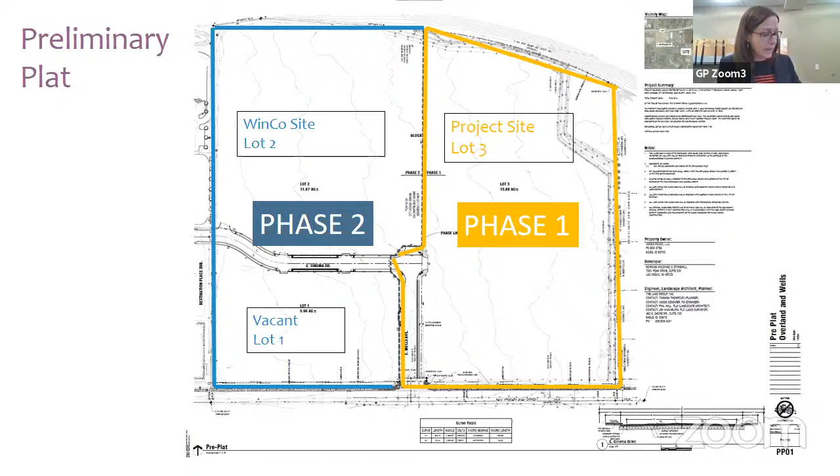Phase 2, the western site, the 2 lots that are there, will include development of those lots and the extension of Cinema Drive at the time that development proceeds. That's the phasing we outlined in our preliminary plat, and that is the phasing ACHD has approved as well.

In addition to the DA modification and preliminary plat, consistent with the existing CG zoning, we're requesting approval of a conditional use permit for the multifamily use. Seasons at Meridian proposes 360 apartments.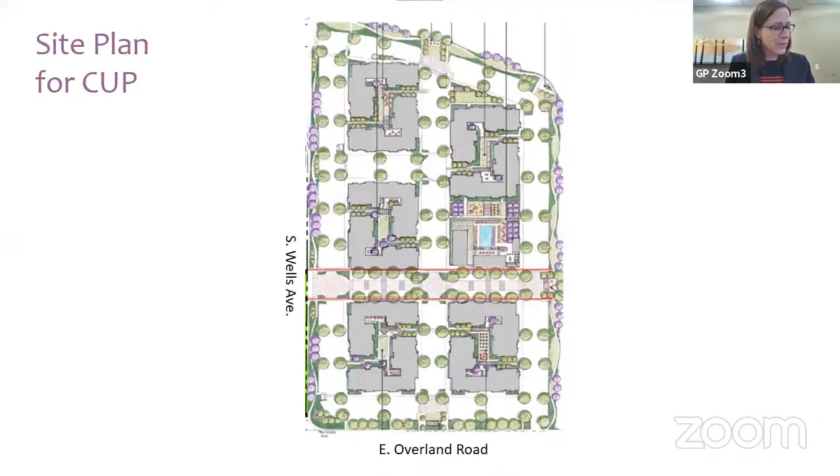The site intent includes 10 L-shaped buildings arranged around internal open space areas to create smaller neighborhoods within each building, basically pocket parks for active and passive recreation and gathering. The idea is to create one large community, and within that large community have micro communities where people can gather with their neighbors. Here's an aerial showing that arrangement.

Here we've got the elevation perspective. Each building's been designed to create a sense of scale by incorporating a blend of 2- and 3-story roof lines, softening the overall massing of the architecture. You can really see that on the west elevation, which is more expensive construction than just taking it across, but it creates that nice mix.

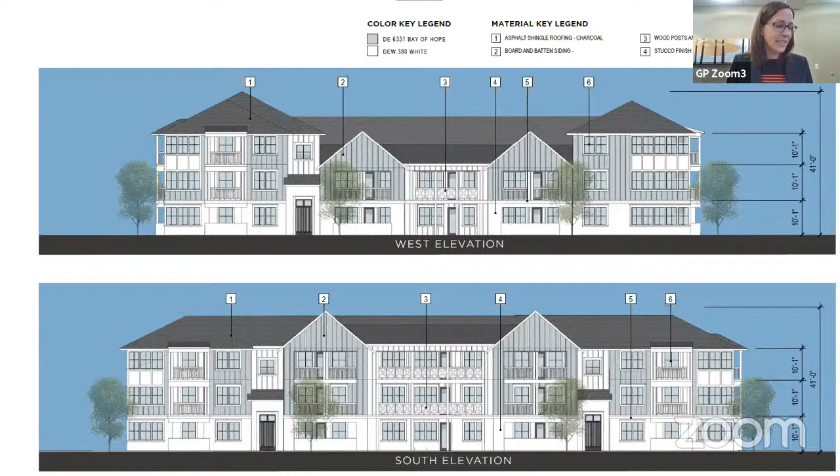Those will be the exterior facing elevations to the property. Pedestrian access is provided by several formalized enhanced entry gates for each building, concealing the stairways away from public view. Here's another view of the buildings in perspective.

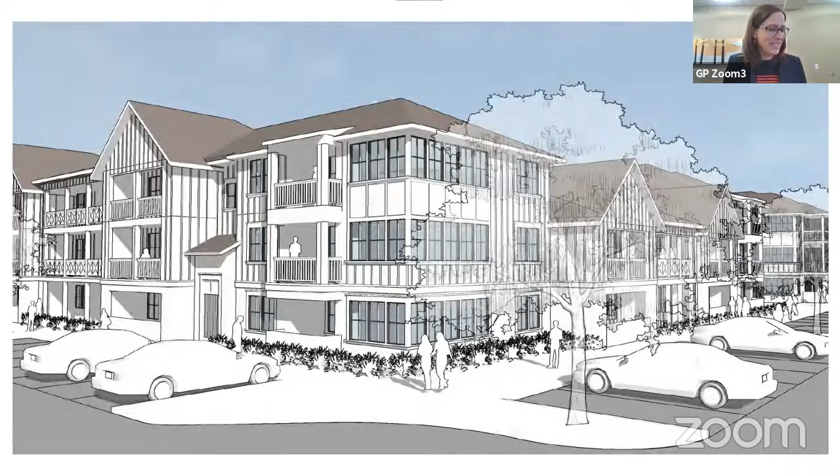The apartments will include a mix of studios, 1-bedroom, 2-bedroom, and 3-bedroom units, ranging from 480 square feet to 1,328 square feet. Each unit has been designed with expansive private patios and balconies with a minimum of 80 square feet to create that indoor-outdoor experience, catering to the outdoor lifestyle.

The interior of the units are designed to accommodate today's ever-changing market with open, spacious floor plans and an abundance of glass. Informal living dining areas have large island kitchens, ideal for entertaining for that casual lifestyle. Other amenities include large bedrooms with walk-in closets, dual vanities, master suites, large showers, and ample storage space.

The architectural theme is contemporary farmhouse. A combination of vertical board and batten siding, stucco, and decorative balcony rails along varied color schemes create this soft, well-balanced exterior facade.

Seasons at Meridian will include 4.15 acres of qualified open space. That's 26%, nearly double the 2.1 acres required by city code for this site. Internal pathways and sidewalks are linked throughout the site, including a perimeter half-mile walking loop.

The site includes a dog park in the northeast quadrant, a large centrally located clubhouse with pool and barbecue seating, and courtyards within each building enclave. Each enclave has a seasons theme, hence the Seasons at Meridian name. Yes, there are 5 enclaves, and so there will be 2 summers, which everybody needs more summer in their life. Significant landscape buffers will provide attractive screening along all perimeter borders.

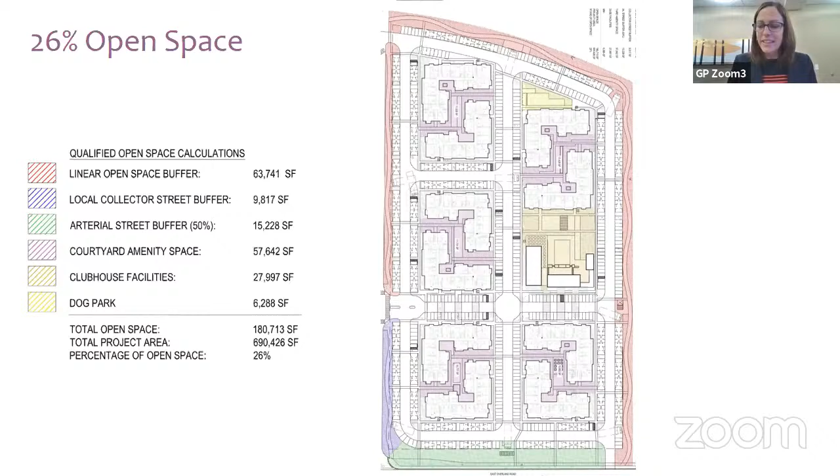And the amenities are extensive, and Sonia walked through some of these. There will be 26 qualified amenities representing each of the 3 categories listed in your UDC. The clubhouse includes parcel lockers, a bike maintenance room, remote work classroom stations, a coffee bar, and an outdoor fireplace with seating and barbecue areas. There's also fitness facilities and public art.

The project includes 18 grassy areas that meet your criteria for 50 by 100 feet. These include a variety of amenities, including a dog park, multiple courtyards, park areas with seating and pocket libraries, plazas that dot the trail circumventing the property, a community garden, a pool, walking trails, and a children's play structure.

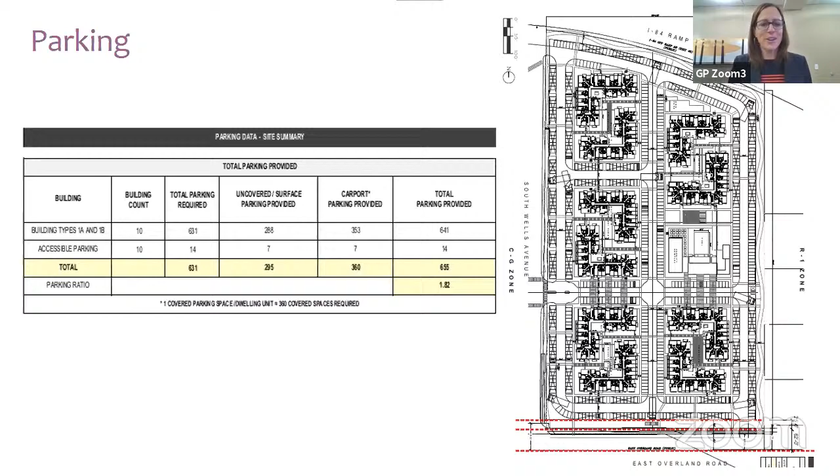The Seasons at Meridian is designed to integrate with surrounding uses. Our tree-lined east-west driveway aligns with Cinema Drive, which will ultimately extend through the Winco site when it's developed to the west, creating visual and physical integration with the commercial uses to our west. On our east side, there's a single-family residential county subdivision without vehicular connectivity, but we still provide pedestrian connectivity and welcome these residents to enjoy our walking paths.

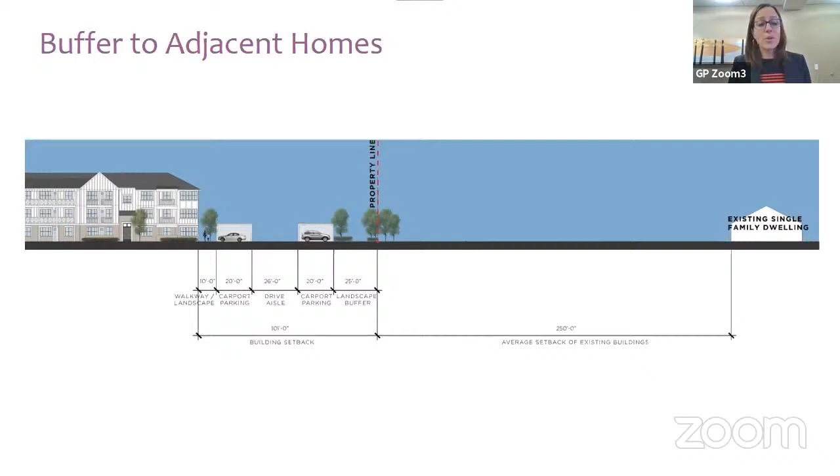We have also created a significant buffer between the proposed project and the existing homes to our east to ensure compatibility. Our buildings are set back over 100 feet from the side property line, and the average setback of neighboring residences from the property line is at least 250 feet, looking more like 270 feet based on Google Earth.

This project will maximize and use existing city services by connecting to adjacent utilities and by locating housing close to existing fire and police infrastructure. ACHD has reviewed and approved the traffic study for the development and the proposed access points.

To mitigate impacts of the apartments and the future Winco development, the applicant will extend Wells Avenue, install a new signal at Wells and Overland, along with a right turn lane on Overland onto Wells. Cinema Drive will be extended through the Winco site with phase 2. No other mitigation was required by ACHD, and all of their conditions of approval are acceptable.

The project will have minimal impact on school enrollment. Based on West Ada School District's calculations, the project will only generate 36 students.

As Sonia noted, we just have one change that we request to the conditions of approval. Otherwise, we're in full agreement with the project report before you, and that relates to the timing of the extension of Cinema Drive.

As noted in this condition, Sonia wants that to be done with phase 1, but it's not needed to serve phase 1. The apartments have primary access from the extension of Wells Avenue and secondary emergency access from Overland Road. The traffic impact study prepared for the Seasons at Meridian project did not assign any of our trips to Cinema Drive, to that extension. It made no assumption that it would be there, instead assumed that all trips would use the Wells Avenue extension. With those assumptions, the Wells Overland intersection with the signal and the Overland Road segment between Wells and Eagle Road still met all adopted levels of service.